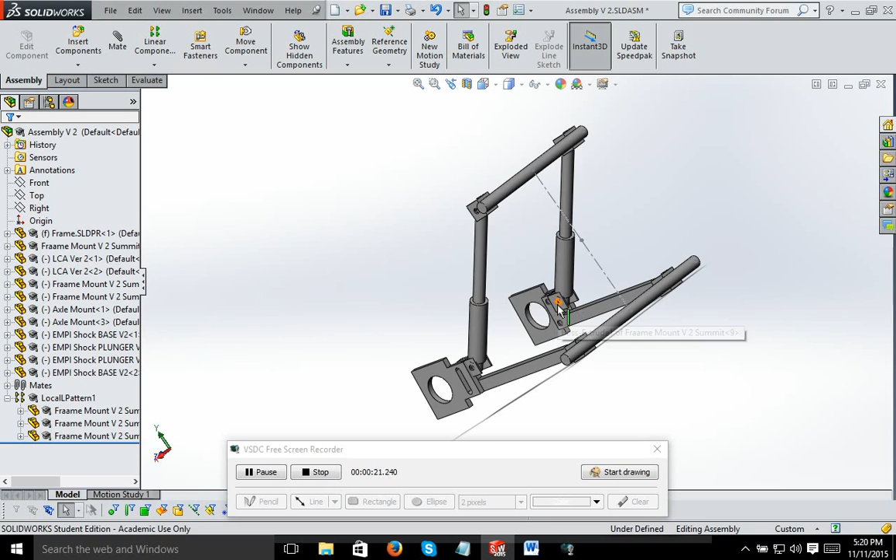For my senior project, I am designing suspension for the rear of an electric vehicle frame. In this design, we've got lower control arms tied to the existing frame, represented by these two members over here, and those are attached by brackets at the top and bottom, as well as at the lower control arm, and that ties the system together.

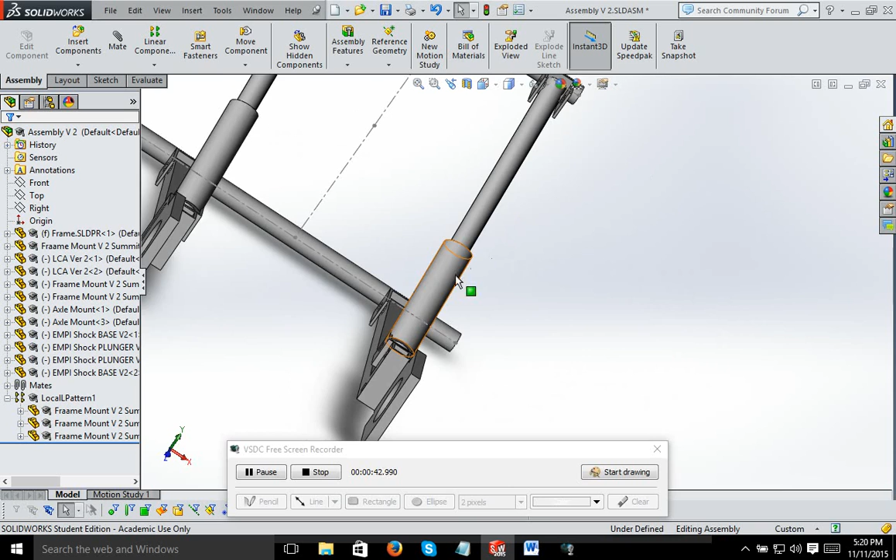These two pieces are existing axle mounts that attach to the lower control arm, part of a previous project that was already completed. And this is more or less a mock-up. The brackets, since they're being outsourced, will have slightly different dimensions. Same with the coilover tubes. There is some interference right here in the model, and that's simply just because it's for reference. Once we get the actual pieces in hand, that can be adjusted.

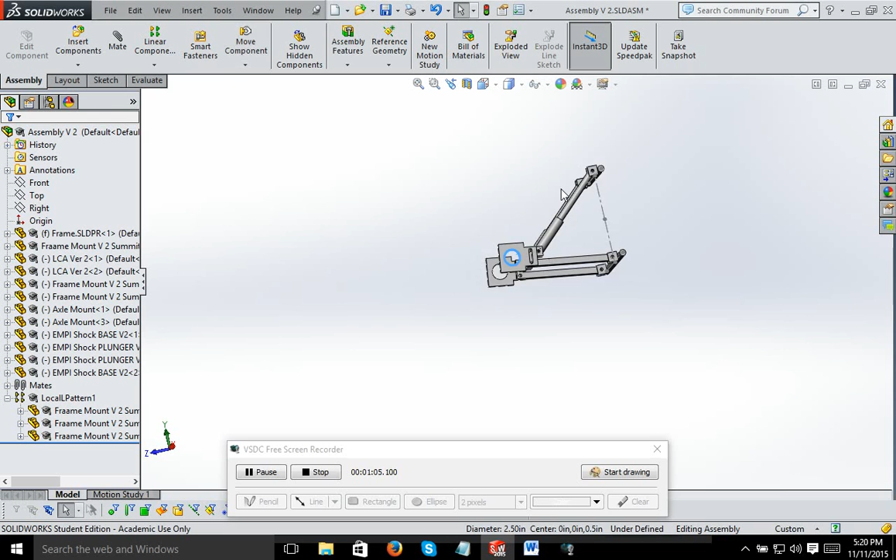And to show it in motion, we're aiming for about 5.5 inches of shock travel. The extended length of the coilover is about 16.75 inches, which is more or less what we were aiming for with the calculated figure, and should be able to withstand about 1,500 pounds of a static load. Each one is rated at 700 pounds, and this is 1-inch square tubing, so it's going to be well beyond what's required in the materials.

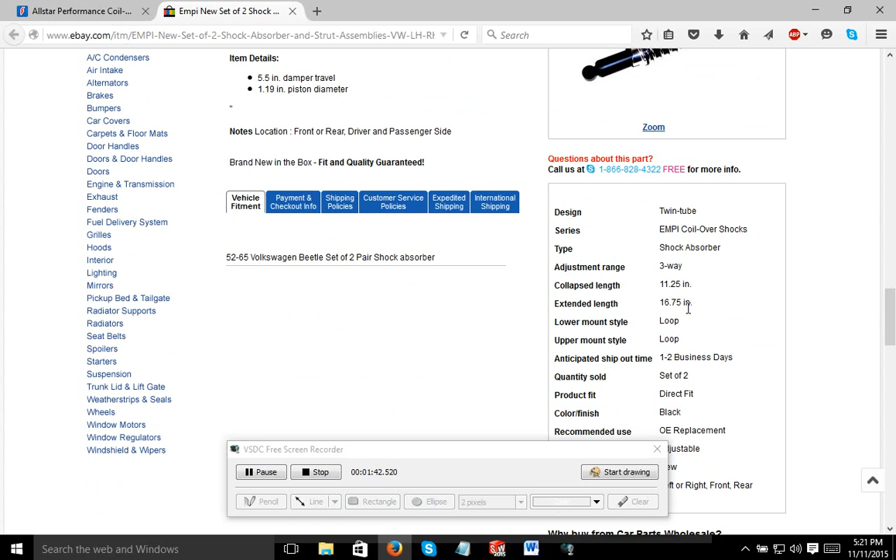The shock absorber assemblies are sourced from a company called EMPI, who makes aftermarket Volkswagen parts, and you can see here it's got an extended length of about 16.75 inches and a collapse length of 11.25 inches with a 5.5 inch stroke. And the brackets are from a company called Allstar Performance. They're just a generic coilover bracket, but it includes the bushing, nut and bolt for $6.89.

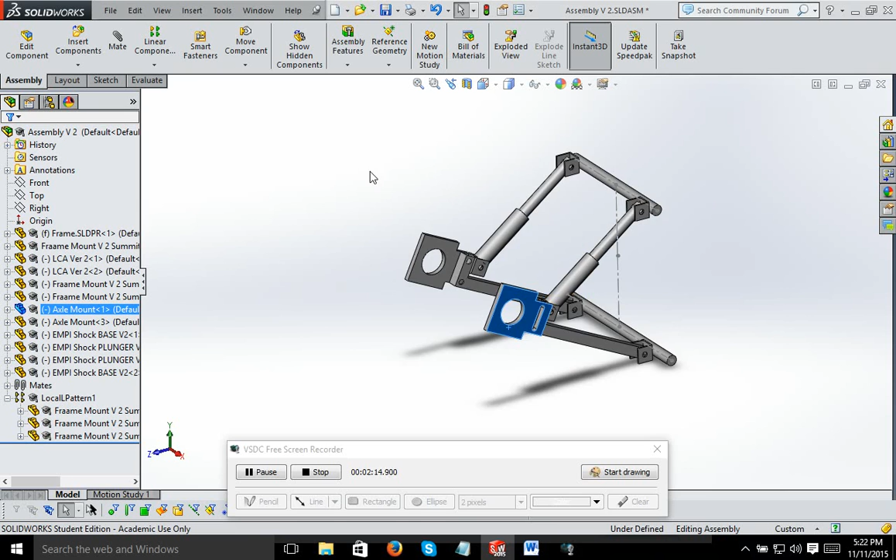The EMPI shocks are somewhere in the neighborhood of about $100, and the brackets are about $7 a piece. So with 6 of those, $43. The material cost is well below the limit of $200. And it should function as needed, giving us about the 5.5 inches of travel that we need.

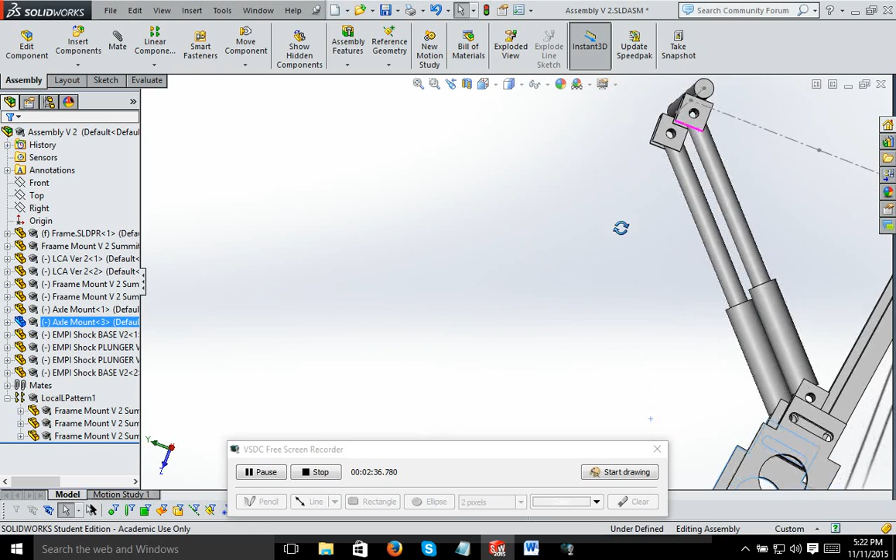Like I said, there is interference in the model that will need to be taken care of after the fact, but once we get the parts in hand, we can remodel them after that. Right now it's a simulated 1.5 inch bracket with 1/8 inch steel, and there are no bolts in this assembly. Everything's just mated concentrically. And that's simply for reference until we get the final parts in hand and can do drawings of them. And that is it.